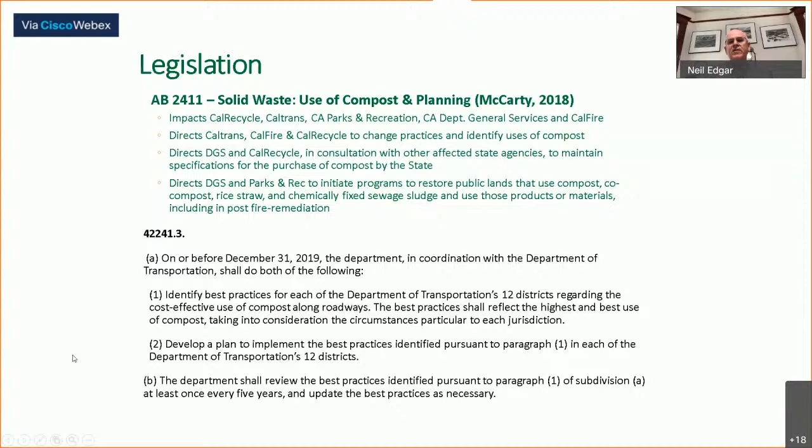AB 2411 passed 2 years ago and has matriculated this workshop effort and a renewed effort between Caltrans, CalRecycle, adding in the Department of Parks and Recreation, Department of General Services, and CAL FIRE, directing CalRecycle, CAL FIRE, and Caltrans to change practices and identify the use of compost. It directs DGS and CalRecycle to maintain specifications for the purchase of compost in the state, which Caltrans has had in place for several years, but this will extend out to other state agencies. And it directs the Parks and Rec Department to initiate programs to restore public lands that use compost, co-compost, rice straw, etc.

My one takeaway is that we need to help build markets for the additional compost and mulch products that are going to be recovered under SB 1383 programs. And we're going to need everybody's help in developing those markets, including Caltrans, Department of General Services, Parks and Rec, and every agency in the state to help move materials to sustainable uses. I am happy to answer any questions.

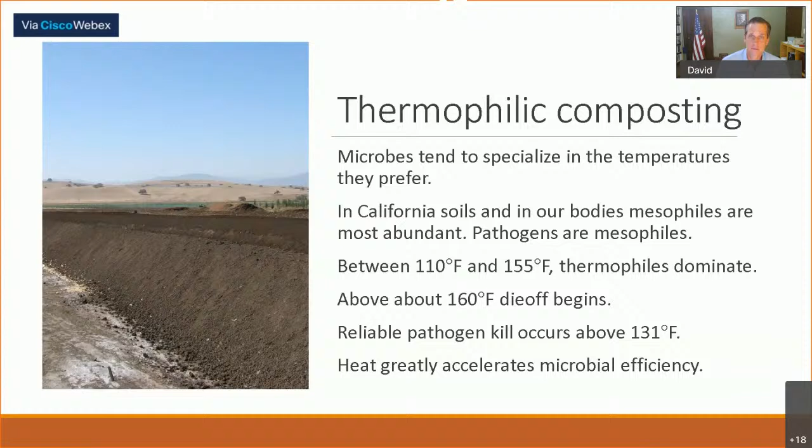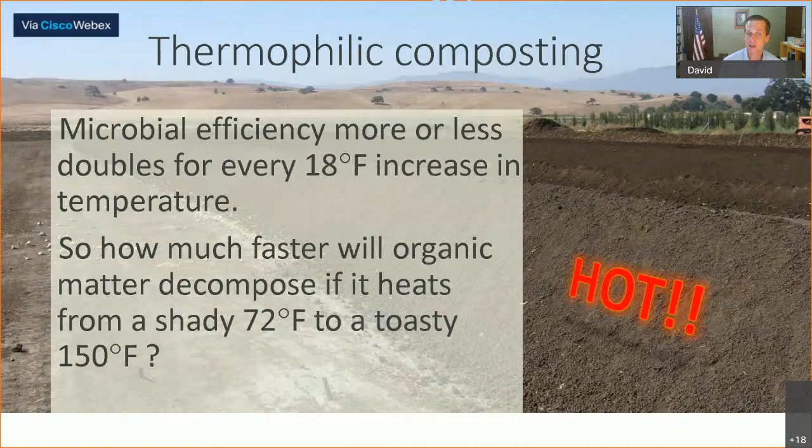If you're a composter in the compost business, you don't make money by having a bunch of material on your site. You make money by bringing in feedstock and moving it off as cured compost. Heat accelerates how fast microbes work. For every 18-degree increase in temperature, microbial efficiency approximately doubles. So how much faster will organic matter decompose if it heats from a shady 72 degrees Fahrenheit to 150 degrees Fahrenheit, as you'd find in a compost pile? The answer is 25 times faster. That's a big deal.

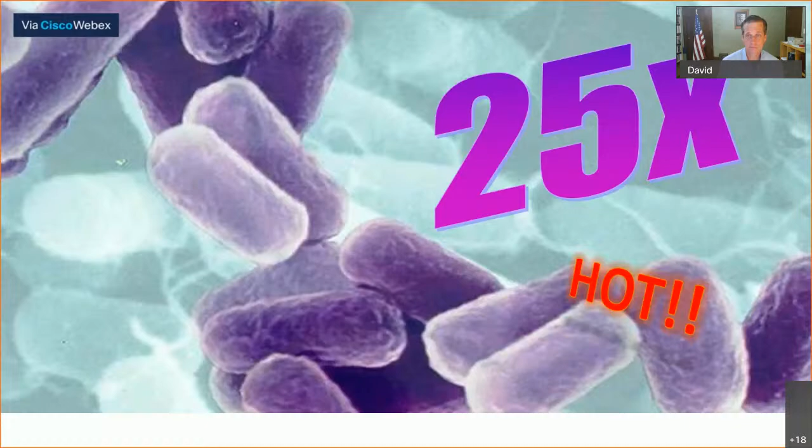So why compost? We compost for a variety of reasons. We want to eliminate disease organisms. Sanitation is important - we can eliminate animal diseases, human diseases, but also plant diseases. We're taking these materials and applying them to plants, so we don't want to be transmitting diseases. We also produce a nice, stable, and safe soil amendment, one that releases nutrients rather than tying them up, and one that's free of objectionable odors and phytotoxins. During the compost process, as materials break down, they can go through forms that are actually toxic to plants - phytotoxins. So you want to make sure it's stable and those phytotoxins have been thoroughly decomposed before you apply it. Composting takes care of all these issues.

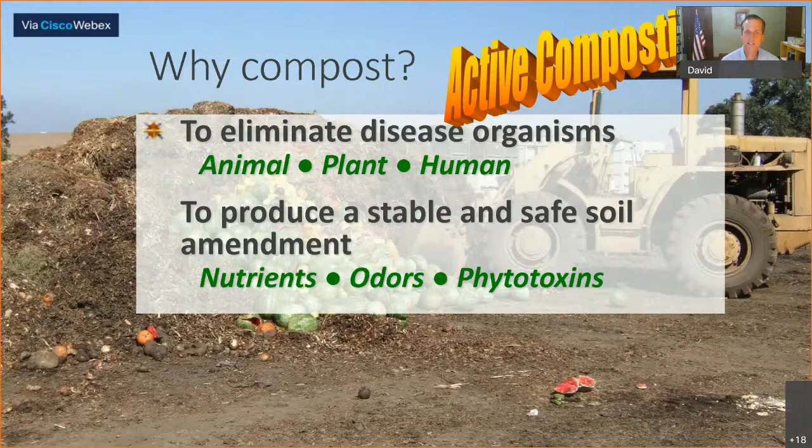It takes care of it in two phases. In the active phase, the pile is crazy hot and the microbes are getting everything they need to thrive and reproduce. It's an enormous party in the pile, where they're grabbing a bit of food, partially decomposing it, throwing it over their shoulders, and grabbing another one. Those nibbled materials can be toxic to plants and can contain odors. So during the party, it's a big mess - chaos. Eventually the food gets eaten up to a point where it's less interesting. What happens at a party when you start to run out of food? The party dies down, people leave, there's less activity. What's left over is a mess, and you have to clean it up. You clean it up through curing.

A composter manages the material very carefully. During the active phase, it's hot with a lot of action and activity. During the curing phase, the pile is just left to sit, and microbes clean up partially decomposed materials that may have odors or be phytotoxic, until the material is nice and stable and ready for use. That's called curing. You want a well-cured material, free of objectionable odors, before you use it.

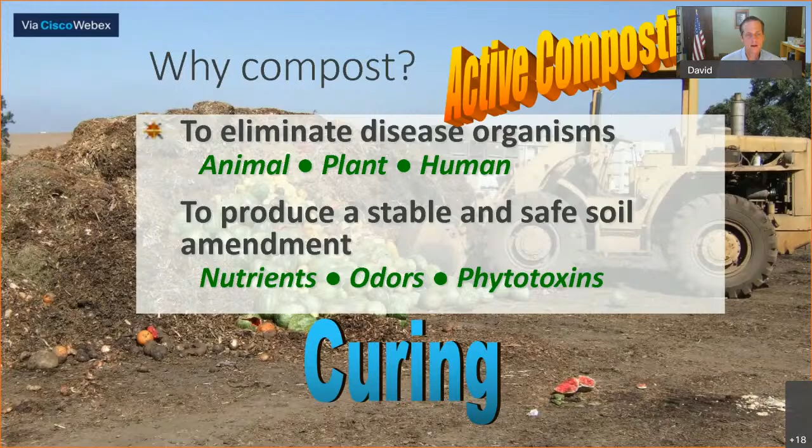Compost, of course, has some odors - we call those odors good and appealing when it's a good material. So composting is a biosecurity measure for plants, for animals, and for humans.

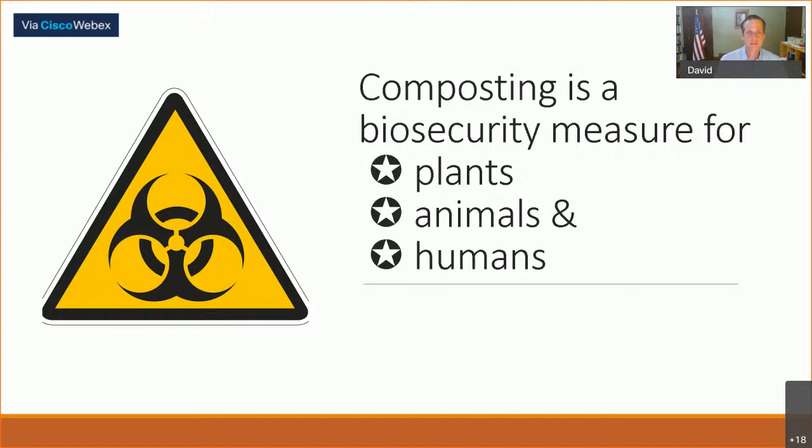All right, so we're going to circle back through what we just talked about and go into more detail now. A composter is manipulating a variety of components in order to achieve optimal results, optimal conditions for the microbes.

Carbon is the source of energy for the microbes, just as it's our source of energy. The composter will deliberately provide that to the microbes through the feedstock. But not all forms are equally available. You know your sugars are more available than anything else in your diet. You've got fats and proteins and maybe waxes too, and you can break those down.

Microbes can also break down cellulose, which is the stuff you find in wood chips, and lignin, which is an even more recalcitrant or difficult to decompose material that you also find in wood. So if a material has a lot of cellulose and lignin, it's going to break down more slowly out in the environment.

Sugars, fats, waxes, and proteins are going to break down mostly in the composting process itself. But you have to have the carbon there to provide the microbes food.

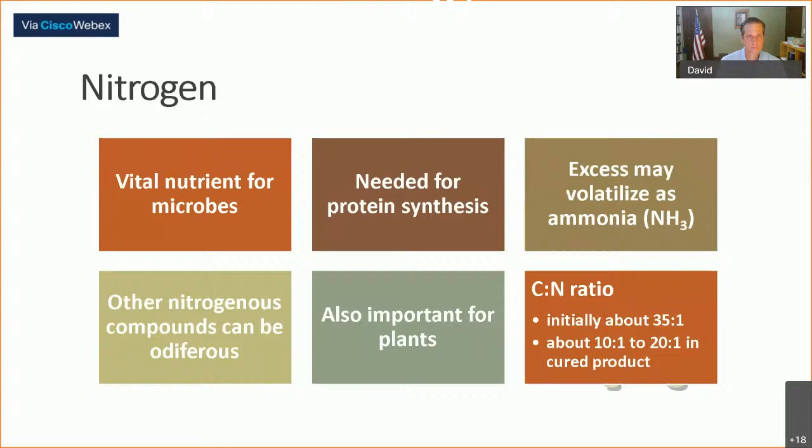Oxygen. Why do you breathe? You all know that you need to breathe—you're breathing all of the time. If you don't breathe, you feel really uncomfortable pretty quickly. But why do we do it? We do it because oxygen acts as an electron acceptor.

As we break down our food, a chemical reaction occurs and we release energy. But the amount of energy is determined quite significantly by where we put electrons that are being transferred within the reaction. If we transfer those electrons to oxygen, we can release a lot of energy—it's really, really efficient.

Okay, same in a compost pile. You can have a compost pile without any oxygen, and it will break down, but really slowly. You won't get the heat you need to inactivate pathogens, and you'll have odor problems. So the most important thing in managing a pile to avoid odor problems and achieve rapid processing is to make sure oxygen is available to those microbes.

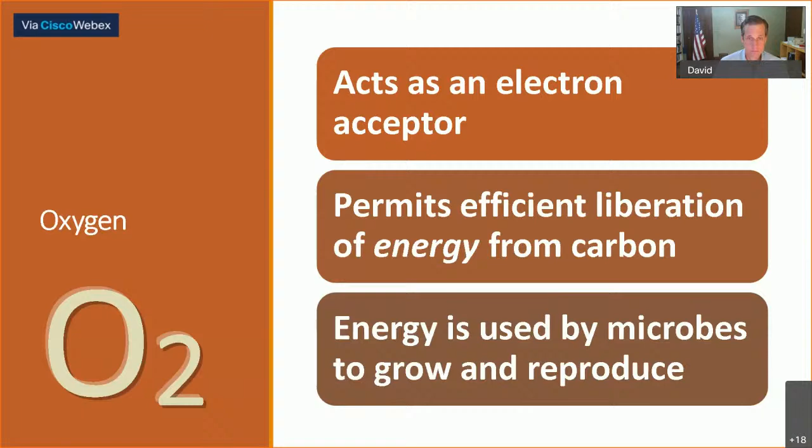So you saw this slide earlier. This is called a turned windrow.

Why do you turn a pile? Now, most people think you turn a pile because you're stirring in oxygen somehow, mixing oxygen in. But there's a huge amount of activity in these piles, so the oxygen you get into the pile when you turn it is probably gone within just a few minutes. It gets depleted because there's so much activity, consumed right away.

But a turned windrow is a really beautifully designed heat engine for restoring oxygen into a pile. What happens is, in the middle of a pile, you have heat, because compost, it turns out, is a great insulator. If you ever put your hand into a large pile, you can feel it gets hot right away, and it holds that heat. So the gases given off by the microbes, that carbon dioxide, expand and rise out of the pile like a hot air balloon.

But nature abhors a vacuum, right? You've heard that. So what happens is that creates a draft, and as the used air leaves through the surface of the pile, it creates a draft that brings in fresh air from the sides. And so you get this cycle of restoration of oxygen.

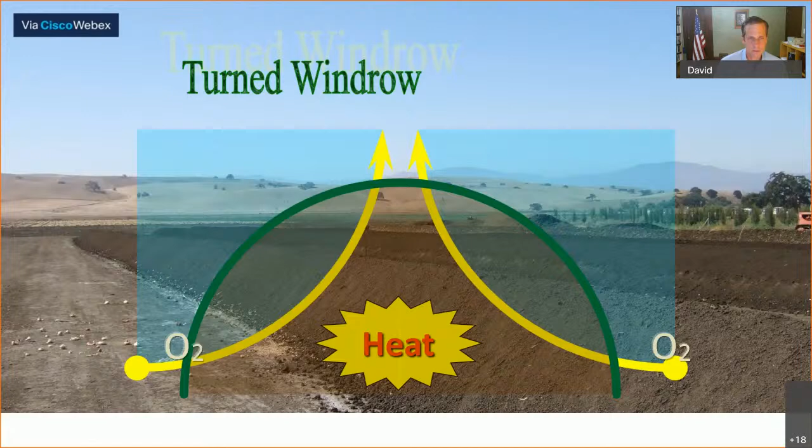Water. Okay, water is critical too. Water is where the microbes live. They live in a bath on the surface of particles. The water clings to the compost particles really well. Microbes live in that bath, and they can't live without it, really. They can't reproduce without that water bath. They live in the water.

But if there's too much water, it fills up the pores in the pile, and then oxygen can't get in. So composters need to make sure there's enough water for microbes to have a place to live and grow, but not too much so that they don't fill up the pores, so that it goes what's called anaerobic, or without oxygen.

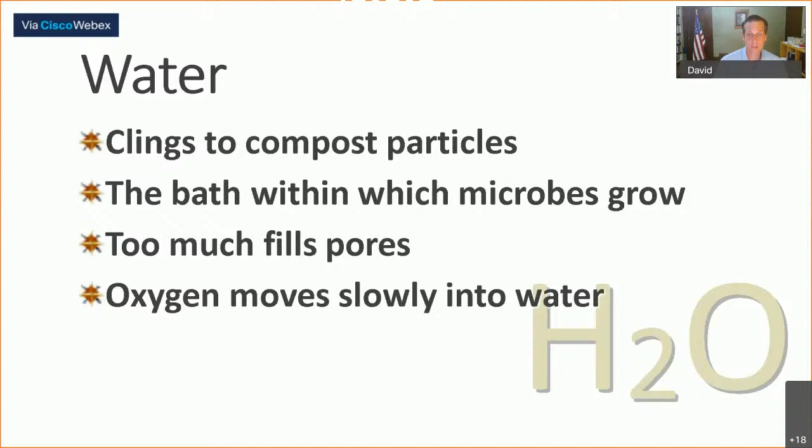So here's a picture of compost particles, and there are passages between the particles through which air moves. Inside the particles, there's not a lot of air, but that's where the food is. Outside the particles, that's where the air is. So the microbes are living on these thin films of water surrounding the particles. They get their oxygen from outside the particle and their food from inside the particle.

And you can see if there's too much water, those pores that the air is moving through are going to get filled up, and the microbes won't have the oxygen that they need. It goes anaerobic, and that's when you get the odor issues.

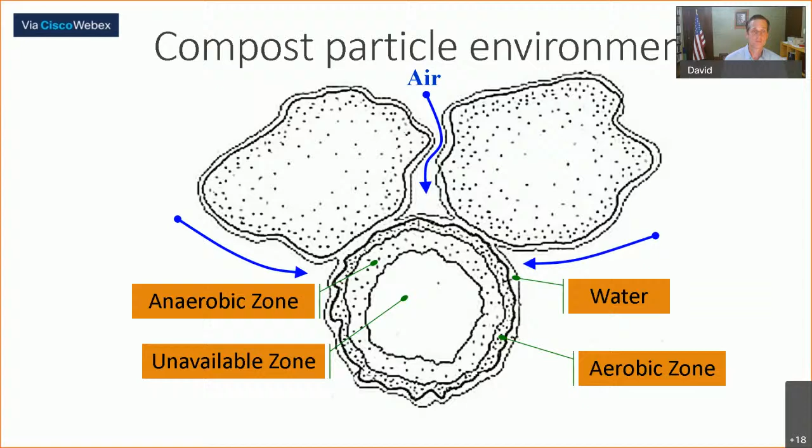Next slide. We have three broad categories of compost technologies. We just talked about turned windrow. That's the majority of our systems.

Turned windrow systems are very efficient, but they do require a certain amount of land. And so we're seeing an increase in static piles, because those can be built a little bit closer to residential areas, for example, or places where people are around. In a static pile system, you're actually forcing air through the system mechanically, rather than just turning it and allowing that passive heat engine to take place. Those are becoming increasingly popular.

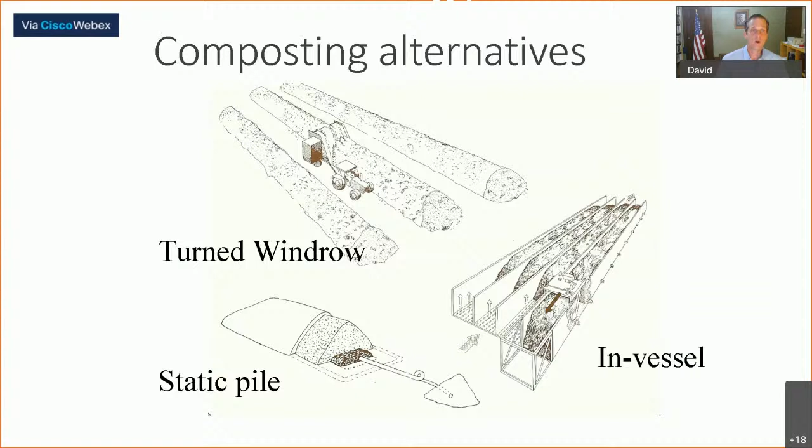In-vessel systems, you can do composting indoors. And if you do it indoors, it's an in-vessel system. Those are nice for engineers because you can capture the gases coming out of the pile and treat them, but they are much more expensive than the other alternatives.

Next slide. All right, so you're a composter, you've got your technology. What are you managing? Particle size. You want a size that's big enough to create those pores, but not so big that the microbes can't eat it in time for market. If the particles are too big, it's really hard to consume the inside. If they're too small, the air can't get through as well. Particle size is directly related to porosity.

Turning also contributes to porosity, increasing those pores so that air can move through. The carbon to nitrogen ratio is the balance of nutrients to the food source, food supply. Water is where the microbes live, they need that home. If there isn't enough, they won't have it. If there's too much water, it fills up the pores and they don't get enough oxygen. And then oxygen is that electron acceptor that they need, basically, to breathe.

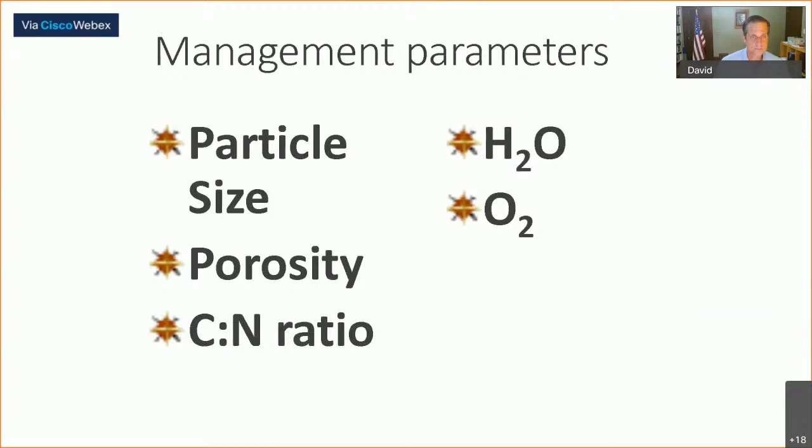Next slide. All right. Soil improvement using compost. So let's talk about how you use compost to benefit soils. Next slide.

Okay, so here's a picture of a food web in a soil. We have microbes in the soil. What are they eating? They're eating plant parts that are decomposing. They're decomposing those plant parts, and they're relying on the plants above them for their food supply. So it's in the interest of a microbe to develop a soil that promotes plant production, because that's what they're depending on for their food.

So it's not a coincidence that microbes actively improve soils so that plants do better. And then all the other animals in the soils and on the soils then eat both the plants, and they actually eat the microbes that are decomposing the plants in the soil in this trophic network through bacteria, fungi, nematodes, all the way up insects to animals. So this is the foundation of our ecology.

So how do they transform the soils? What gives them their superpowers? Well, if you have a soil that's sandy and doesn't hold water, compost will help it to stick together so it can hold water. If you have a clay soil that's really heavy and you can't get air or water through it, compost will stick those clay particles together so that they will aggregate. And those aggregates behave very differently. We'll talk about that in a second.

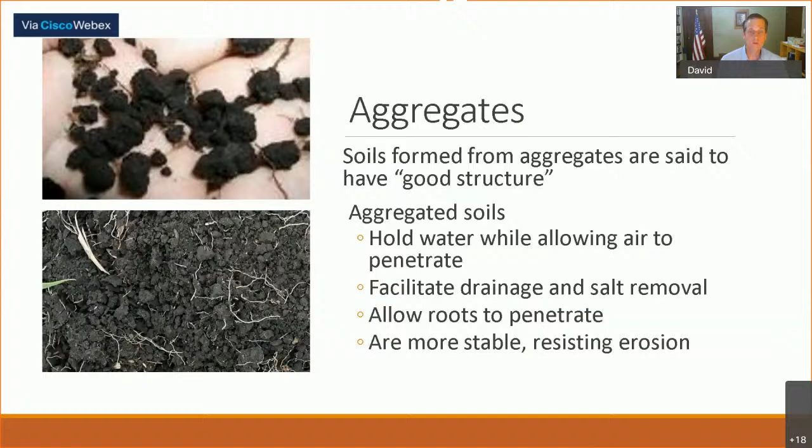An aggregated soil holds water, but it also allows air to penetrate because roots need air. It facilitates drainage, so water doesn't just pond on an aggregated soil, it moves through. And if you have salts that you need to remove, that facilitates salt removal. It allows roots to penetrate. And aggregated soils are also more stable, so they don't erode as quickly.

So we apply soil amendments. What's a soil amendment? A soil amendment is a material you're mixing into the soil, not on the soil, into the soil. And it aggregates the soil when it's compost, and that improves tilth. It improves water holding capacity - you can hold more water now. It improves aeration, since roots need oxygen. It improves infiltration capacity.

If you have a soil that's acid or alkaline, using compost doesn't move it a lot, but it will tend to move it toward neutral. And most plants like a neutral pH. You can buy specialty compost if you're growing acid-loving plants, or alkaline if you want an alkaline environment. It also promotes microbial activity and diversity, and that robust microbial environment can help to suppress certain diseases.

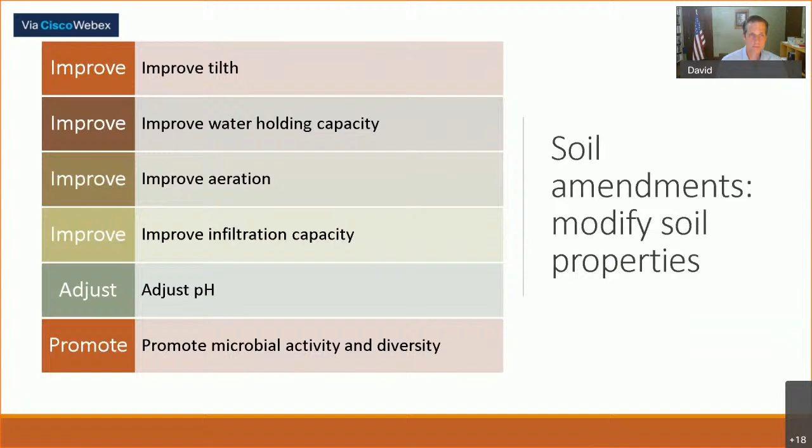So you're mixing in the compost, you want to aggregate it. Keep in mind that these changes take time. You're applying, typically in an agricultural environment, not nearly enough to see an immediate change in the soil structure after you put in the compost, because it's not the compost particles being introduced to the soil that's changing it. Remember, it's the microbes breaking down the compost, the fungi sending out their hyphae, the bacteria gluing the soil particles together that's forming these aggregates that's enriching the soil.

So it takes a bit of time - it can take a few years, and it takes repeated dedication, but you do see improvements. In the laboratory, interestingly, it takes us longer than in the field. If you ask farmers how long it takes, typically they'll say like 3 or 4 years. In the laboratory, it can take longer when we're applying at the agronomic rates typical of agriculture. If you're in a horticultural operation where you can apply a lot more compost affordably, you can create changes much more rapidly.

But when you're picking a soil amendment that you're mixing into the soil, you want it to be mature. You don't want it to have an off odor. If it has an off odor, that's an indication that it's not fully mature, and it may have phytotoxic compounds still present - and those are poisonous to plants.

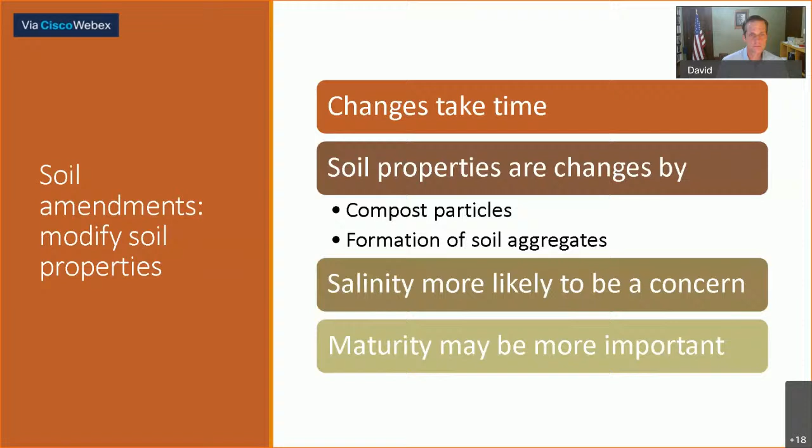Mulches. A mulch is anything covering the soil. You can use compost as mulch, and it will protect the soil against erosion. It intercepts rain particles as they fall and encourages infiltration. Mulches also conserve water because they allow water to get into the soil rather than evaporating from the surface. They control weeds by shading them, can help control certain plant diseases, and they're attractive.

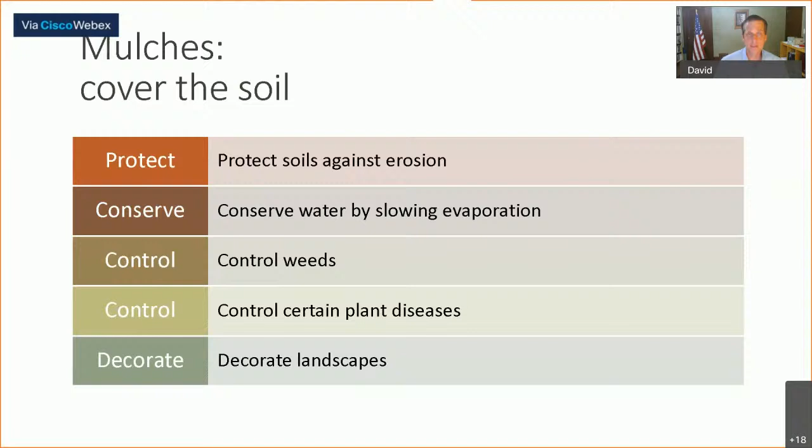So when you're choosing a mulch, what kind of compost do you want? You typically want one with a higher carbon to nitrogen ratio because you're not interested in it breaking down to encourage microbial development and transformation of the soil. The reason you're applying it is to have something that persists on the soil surface as a physical barrier against weeds and against the energy of rain falling on the soil surface. So you also want larger particle sizes.

If particles are too small, what happens? You're basically creating a bed for weeds to grow in. You're also going to hold water up above the soil, and where are the roots? They're down in the soil. So you can actually lose water if you use composts with particles that are too small. You want larger particle sizes, low trash levels because that's where you see them—on the soil surface. Maturity is less important, and phytotoxicity is probably a little less important since you're above the root zone on the soil surface.

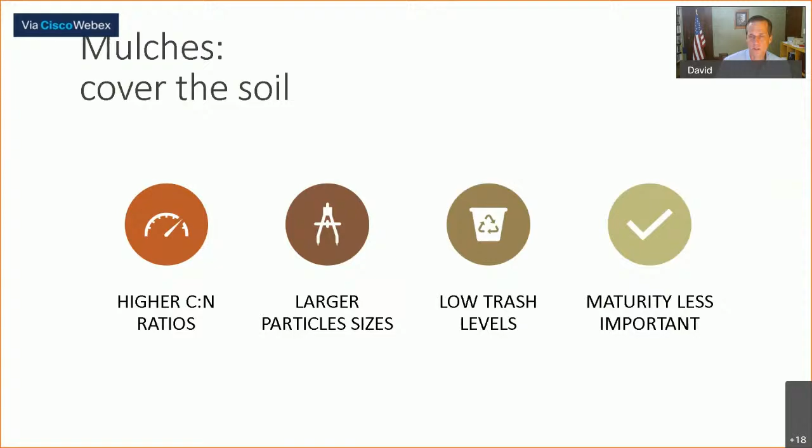Organic fertilizers. Composts contain nutrients—nitrogen, phosphorus, potassium. They're a great source of micronutrients.

But they're not typically marketed as fertilizers because the rate at which the fertilizers are released is hard to predict. It depends on the environment. It depends on the precise characteristics of the material.

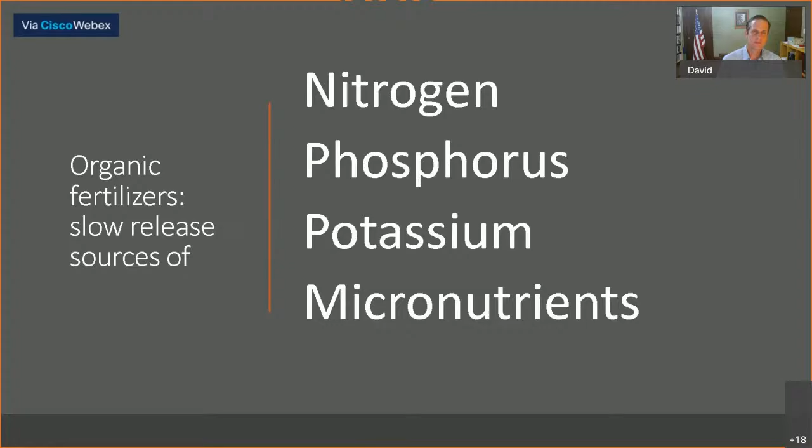So when using organic fertilizers, it's important to conceptualize them as a long-term source and account for them in long-term nutrient budgeting, but keep in mind they're not available immediately. If you're growing corn and need all that nutrient release at once, you're probably going to need to supplement.

But if you're growing plants that need nutrients gradually over time, like a lot of landscape plants, it may be all you need. It may take a few years for the compost to supply those materials continually, but they will be an important source over time, so you may need to supplement at the beginning. Low carbon to nitrogen ratios are better fertilizers because they just contain more nitrogen.

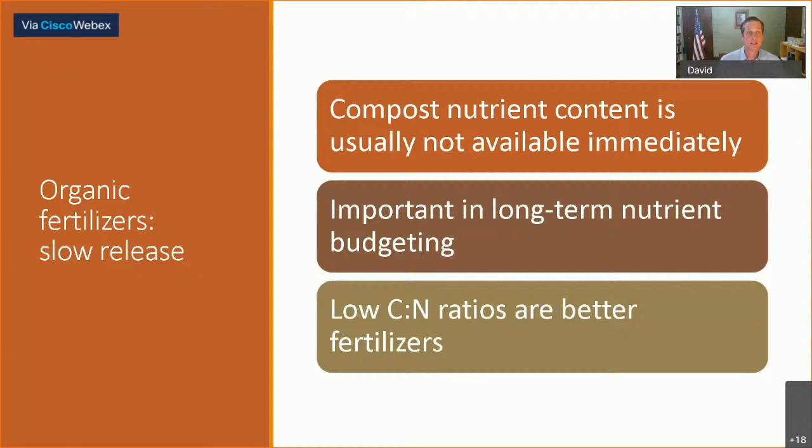Tremendous erosion control. Why? Because the water hits the compost, moves under the compost, and infiltrates rather than running along the surface and concentrating and carrying soil particles away.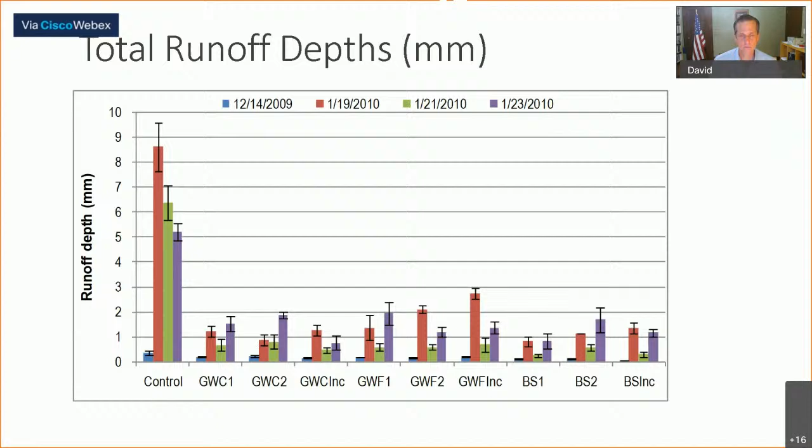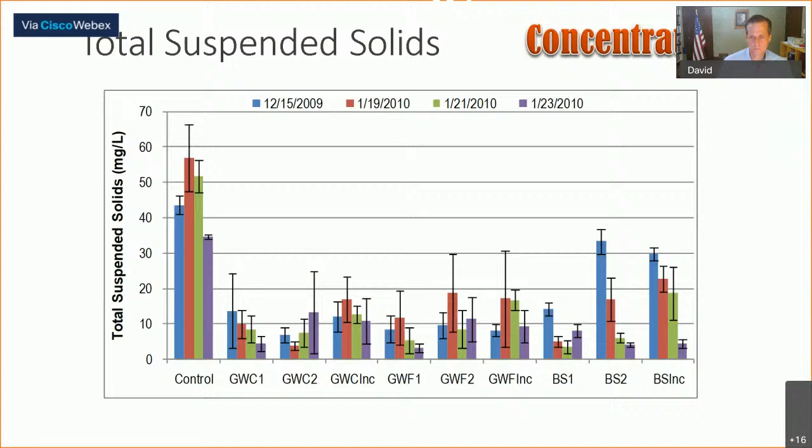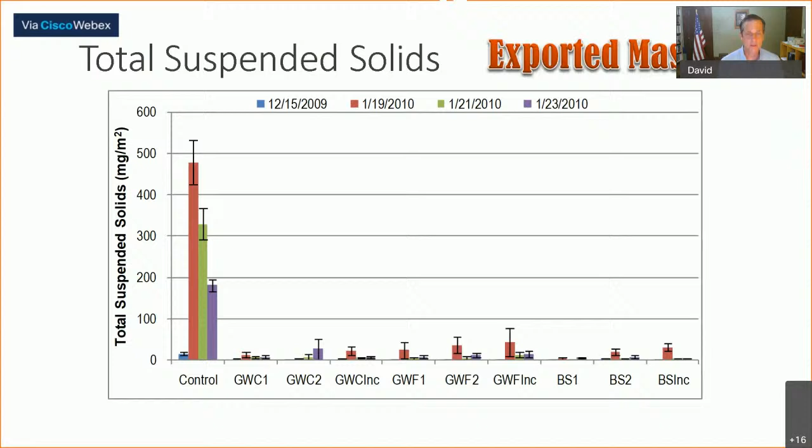Okay, so when you look at this, this is suspended solids. We looked at a bunch of constituents. Compare the suspended solids in the control versus all of the treatments exported. So we had less constituents coming off the plots as a concentration, but when you weight them by the flow rate to look at the total mass that was exported, it was a tremendous difference.

Compost blankets reduced runoff by 86%, dissolved solids by 88%, suspended solids by 96%, total solids by 97%, phosphorus by 72%, orthophosphate by 77%, suspended phosphorus by 98%, and nitrate by 73%.

We found that surface mulching and incorporation performed similarly, so we could actually incorporate it and it still worked. We also found that less was a little bit better, because with some of the things like biosolids we were actually introducing things like phosphorus, but we weren't getting additional benefits. So it was better to go with less rather than more. And we didn't really see much difference between overs and fines as far as pollutant export, which was interesting.

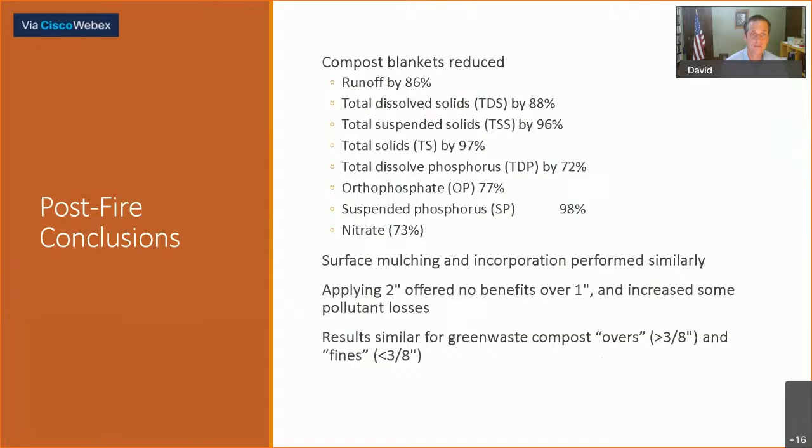So in summary, composting stabilizes organics so that plant and human diseases are eliminated and weeds are reduced. It's a biosecurity measure. Composts inspire microbes to improve soil structure so that they hold and transmit water better, that they retain nutrients, and plants thrive. Compost mulches can control erosion that follows fires. And I am ready for questions.

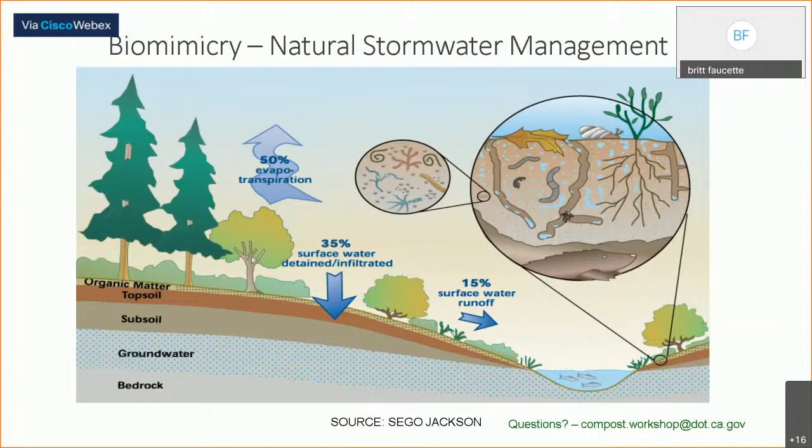If you're relatively new to these applications, you might be surprised that every national or federal agency or organization with the ability to specify or create a guidance document for these BMPs has done so: the US EPA's National Menu of BMPs, the USDA NRCS, the Army Corps of Engineers. The first and original one was through the American Association of State Highway Transportation Officials. Most recently, the US Composting Council. And there's at least one jurisdictional agency, whether the Transportation Department or the State Environmental Protection Agency, in each state that has created a spec or guidance document for these BMPs. In many states, both of them have.

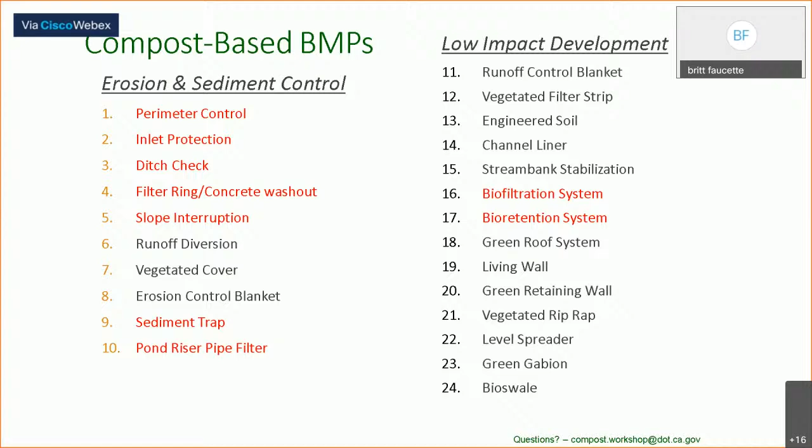After that, towards the end, I'm going to transition to that erosion control blanket compost media. The applications you see in black font here are going to be more related to those applications. Next slide.

So I wanted to give you a visual representation of what these look like in the field, and I think you're going to see a lot more examples of these over the next 2 days in different applications. What you see here is using it for perimeter control along a roadside, slope interruption applications, check dams, inlet protection, and stacking them to make a larger sediment trap. You also see it being used in bioretention and bioswale applications as well. Next slide.

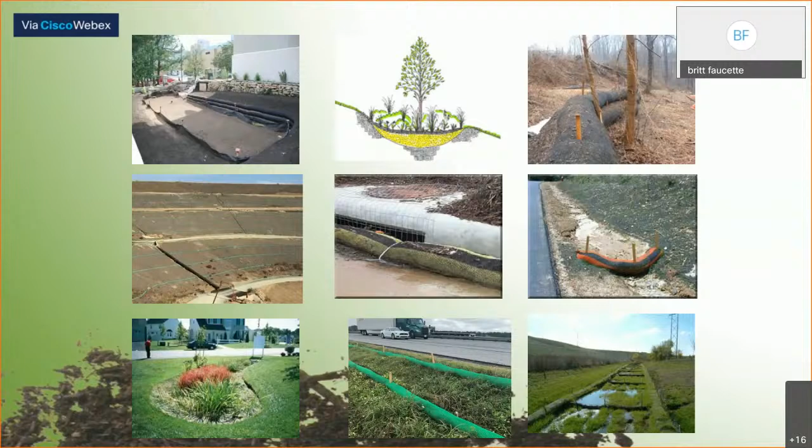This is really no different from what happens when we increase the pore spaces in the material or media. In filtration parlance, we'd call that apertures. It's really no different than how a water filter is designed for your refrigerator or a pool or a sink, or your air filter in your HVAC system or automobile. You increase the pore spaces or apertures, you get a higher flow rate, but you trap less stuff. You cinch down on those pore spaces or apertures, you restrict flow to a greater degree, and you begin to trap more things.

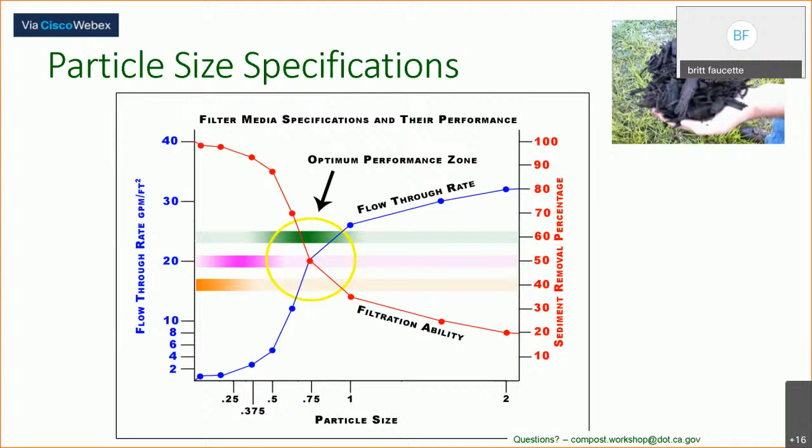One of the things that's really unique about compost filter socks and compost biofilters is there's really a 3-way filtration or biofiltration process. The first one isn't incredibly unique, and I've already talked about and described it. We're manipulating particle sizes, creating pore spaces that allow the passive flow of water, and trapping particulates and sediments.

What is unique are really the next two. There's a chemical component - I don't mean we're adding chemicals - but a high quality mature compost, per particle, has a very high surface area and the ability to adsorb or sorb soluble form pollutants we're trying to trap in stormwater, like ammonium, nitrogen, and a variety of metals. In fact, the US EPA has advocated for many years, and has a guidance manual, for using compost in polluted soil applications to target these same pollutants. Now we're using it in a water context as well.

There's a biological component too. If the material hasn't gone through this composting process, like just a wood chip or mulch material, it doesn't have the high surface area per particle that allows for trapping these pollutants, and it doesn't have that sorption capacity either. Some folks may be familiar with activated carbon or charcoal used to filter water - it's the exact same concept, except compost doesn't have the degree of surface area that activated carbon does.

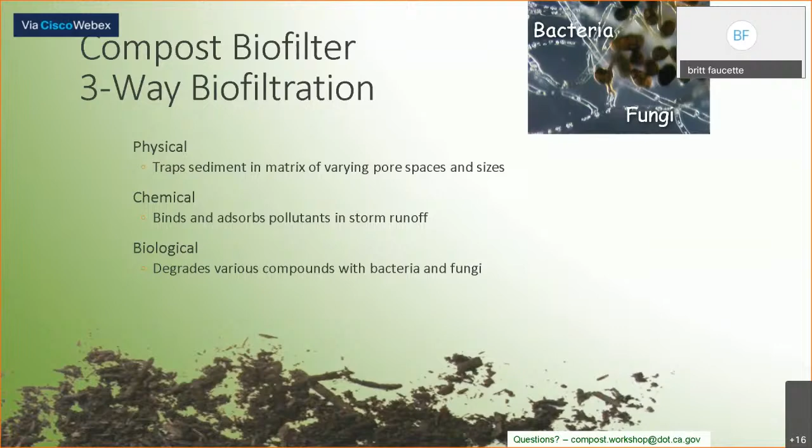So I want to share some of the key research behind compost filter socks and biofilters. This is a study done at the USDA Ag Research Service, published in the Journal of Soil and Water Conservation, looking at the percent reduction in suspended solids as well as turbidity with a compost filter sock compared to a silt fence. You can see the values there.

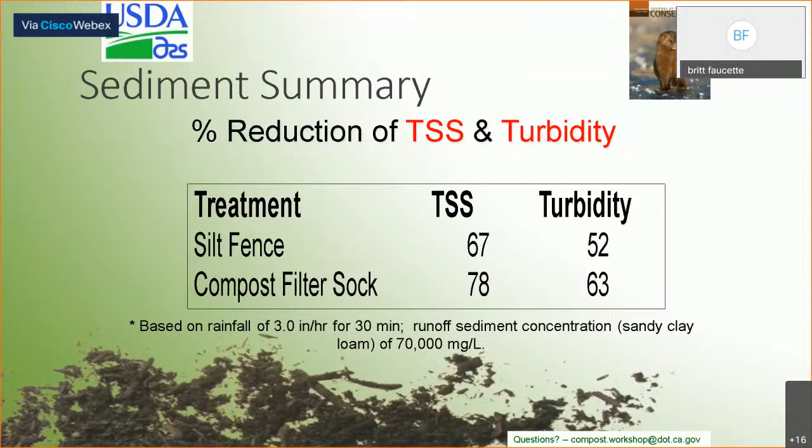A similar study done at the University of Georgia, published in the same journal, different issue, looked at suspended solids reduction on large-scale field test plots. Two key things came out of this study: compost filter socks perform significantly better than other natural materials used for sediment control, like wood chip berms and straw bales. But they also found that a larger diameter compost filter sock didn't improve removal efficiency of sediment - the main reason to go larger is to handle greater drainage area or longer slope lengths, meaning more storage capacity within the system.

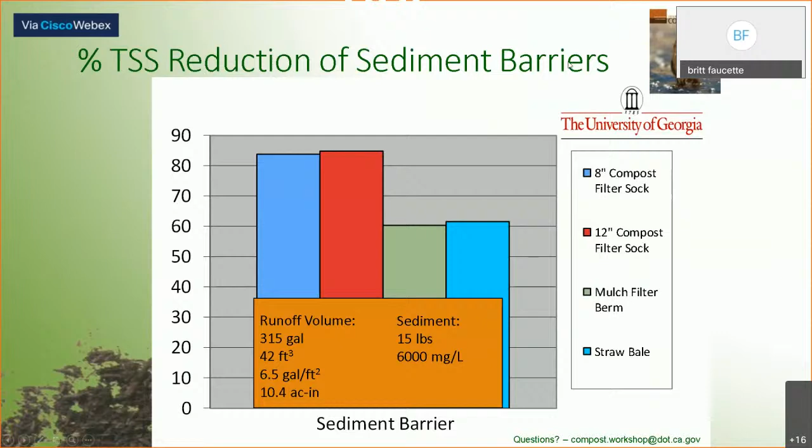Finally, the USDA Ag Research Service wanted to take a look at how these compost sock biofilters could target pollutants beyond just sediment, using them in more of a post-construction stormwater treatment context. We know there are quite a few studies now showing that the total pollutant load in post-construction stormwater can be, on average, about 80% soluble. So you need treatment systems that can target these soluble form pollutants - pollutants not attached to particulates or sediments - whereas wattles and silt fences are not going to work in these types of applications.

That's really what the premise behind this study was, moving past the TSS and turbidity removal efficiency. All of these are in the soluble form of stormwater pollutants in these studies.

Nitrogen species, phosphorus, total coliform and E. coli bacteria removal. They looked at a variety of metals: copper, cadmium, chromium, nickel, lead, and zinc. They also looked at hydrocarbons, motor oil, and diesel fuel. The results from this study have been published jointly in the Journal of Environmental Quality and the Journal of Soil and Water Conservation.

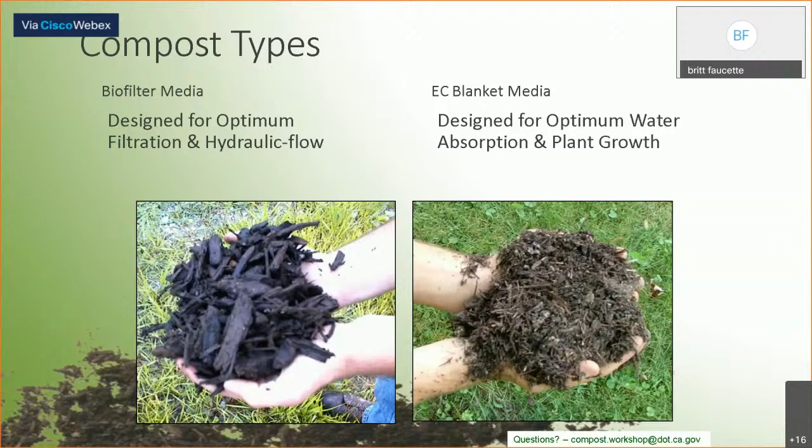There are 4 key reasons why a compost blanket works and performs the way that it does, and David talked about these in his presentation as well. Number 1, whenever you cover bare soil, you're preventing that first stage of erosion, which is splash erosion or soil particle dislodgement. Picture when raindrops come down, they actually almost till up the soil. They loosen up soil particles, they break up soil aggregates, and they loosen it up.

Now we call it sediment. We prevent that from occurring when you cover it with a compost blanket.

Number 2, these things are actually natural megasponges. Because of the porosity, the surface area, and the high organic matter content, they actually hold an immense amount of rainfall right there at the soil surface. If you're holding that moisture there, you allow for natural rates of infiltration to go into the soil below, and you're beginning to restore those natural evaporation rates going back up into the atmosphere. You're beginning to restore that natural water cycle, or hydrologic cycle.

It's the smaller particles that really help to do that. It's the larger particles that do the third one: once it does reach its water holding capacity or field capacity and can no longer absorb any more and you do get runoff, you want to keep it as slow as possible. By keeping it slow, it's less destructive, less erosive in nature, and it actually transports less pollution in the process. And if it's slow, it will find pockets of infiltration as it moves across the landscape as well.

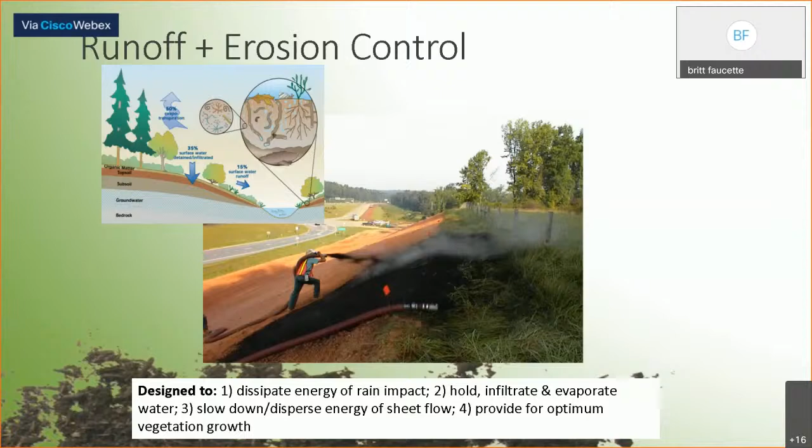So it's the larger particles that do this, it's the surface roughness that has been designed right into the material. And then, of course, the last one: compost is pretty darn good for establishing and sustaining vegetation as well.

This is a study at the University of Georgia, published in the Journal of Soil and Water Conservation, that showed a compost blanket on average could absorb 84% of a 4-inch rainfall event. Think about that for a moment. If you're absorbing that much rainfall, 95% of the events we're going to see, which are quarter inch, half inch, three-quarter inch, one inch, you're absorbing all or nearly all of that rainfall. And if that's the case, you have almost no runoff or no runoff at all. If there's no runoff, there's no erosion. If there's no runoff, there's no transport of pollutants.

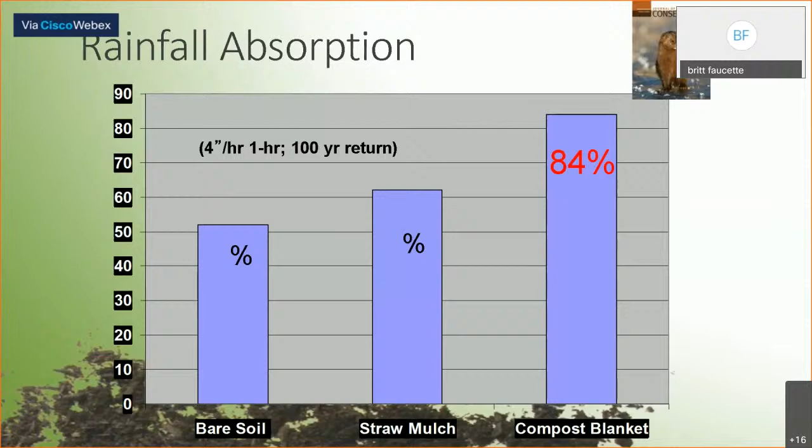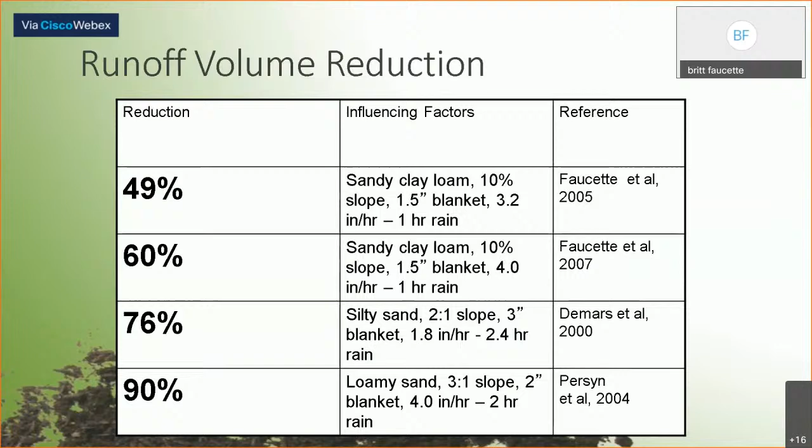Similar for reducing that peak flow rate, same studies between 36% and nearly 80% reduction. Next slide.

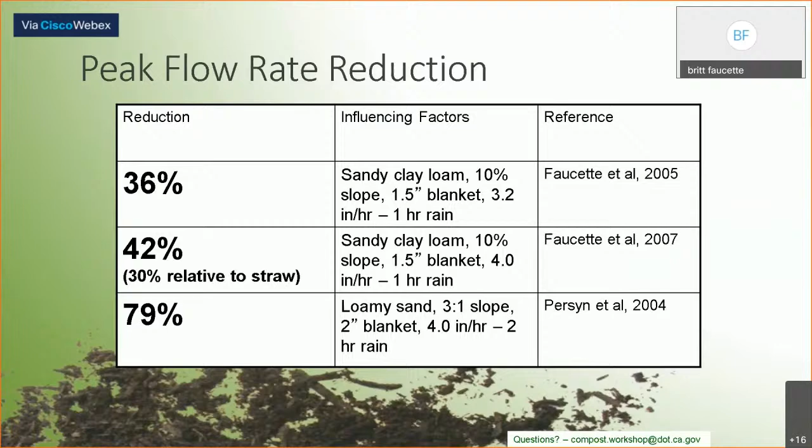These are 4 university studies that compared a compost blanket, a seeded compost blanket, to the way that we conventionally establish vegetation on disturbed soils or construction site soils. I've put that in parentheses in each one of the studies. So what you're looking at here are percentages of the percent reduction in pollutant loads associated with the compost blanket relative to the conventional form of vegetation establishment. You see a trend here, not only across all of these studies but across pollutant types, both for nutrients and for sediment, which is really erosion control in this case.

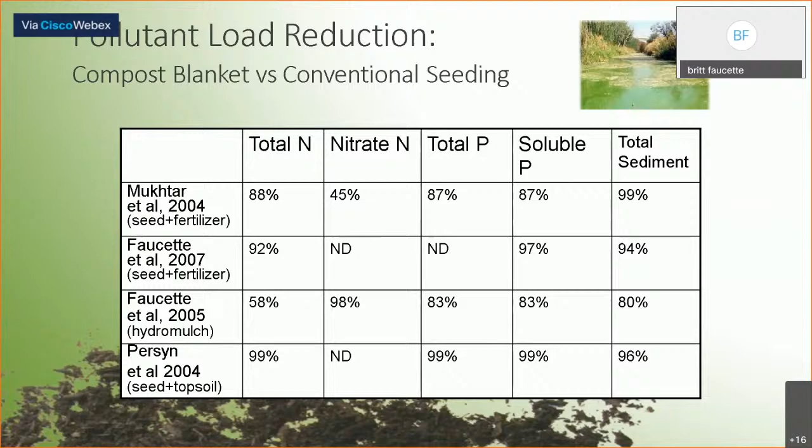There's one key reason, or one big reason why this is occurring, and that is because the compost is absorbing so much rainfall, thereby minimizing runoff. When you do that, you also concomitantly minimize pollution transport as well. We're seeing that across these studies. Next slide.

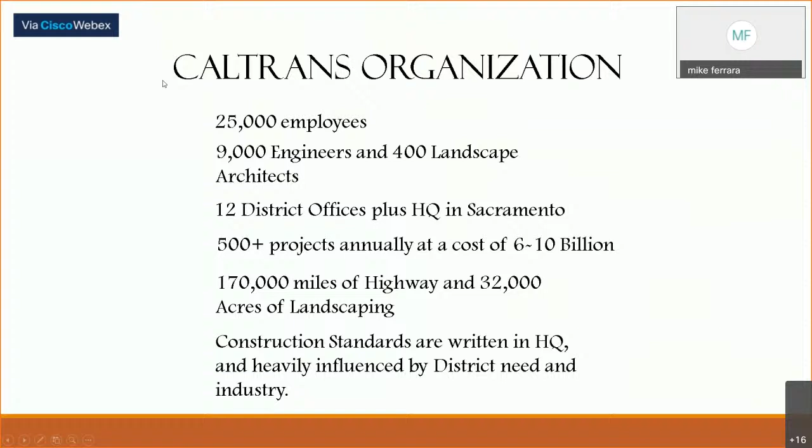The standards we're going to discuss in more detail in this presentation are developed mostly from a bottom-up process. We have a committee of mostly landscape architects, not entirely, that meet together on a regular basis, and they represent the districts, and the districts propose improvements and additions to our standards for their construction contracts.

The geography of California is, to put it in one word, absolutely amazing. As someone who spends a lot of time with outdoor hobbies, there's really nothing you can't do within the state. It's a large state, 250 miles wide and 800 miles long. It's the third largest state behind Alaska and Texas. It's number one in population—we have 40 million people living in our state now. The next closest is Texas at 30 million, but it also has a lot of rural areas.

We're the 13th state in density, so our populations tend to be more concentrated. But there is a lot of our projects that are in very, very rural and sometimes difficult places to get to.

The variety of terrain we work in is nothing short of amazing. The state has the lowest point in the United States, which everybody knows well, Death Valley. But we also have the highest point in the lower contiguous 48 states, Mount Whitney. The fact is those 2 points are within a 2 hour drive of each other, a little less than 100 miles from each other.

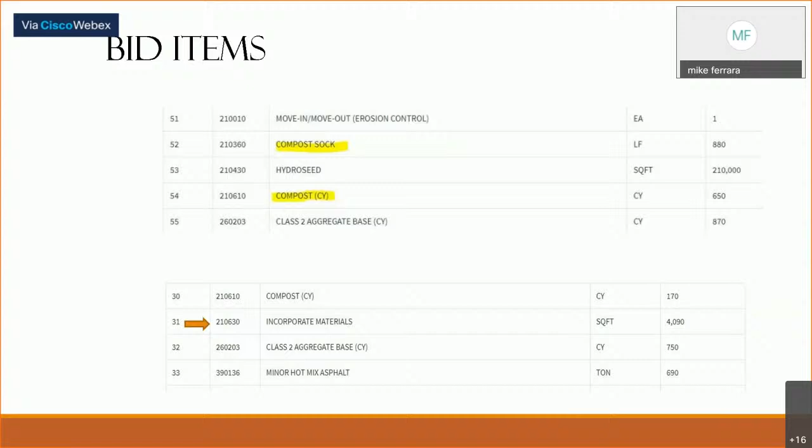This is an actual bid package, I just clipped it out of one you can pull up electronically. It's open to the public, and this is what you'll see on a Caltrans project. When you're bidding on it, you'll see an item for compost sock, typically if there's some stormwater concerns, and they'll bid on that. Then you'll have the other item of compost in cubic yards. My point with this slide is that that is the bid item for berm and for blanket—it's all purchased by the material, and we bid by the material by the cubic yard. You also see down below I clipped out the separate labor item we pay for when we incorporate the compost material into the soil. That's what that bid item would look like.

The method we use is fairly recent for erosion control. We pulled a lot of what we were doing in the specifications and now are more graphically representing what we want for erosion control on our plan sheets. We kind of call it our cake recipe, so to speak. When you look at this table, we lay out the different steps that we want. Often erosion control is a stepped process, and you can see that here, and then we show the rates over in the 5th column, what we want for each of those materials.

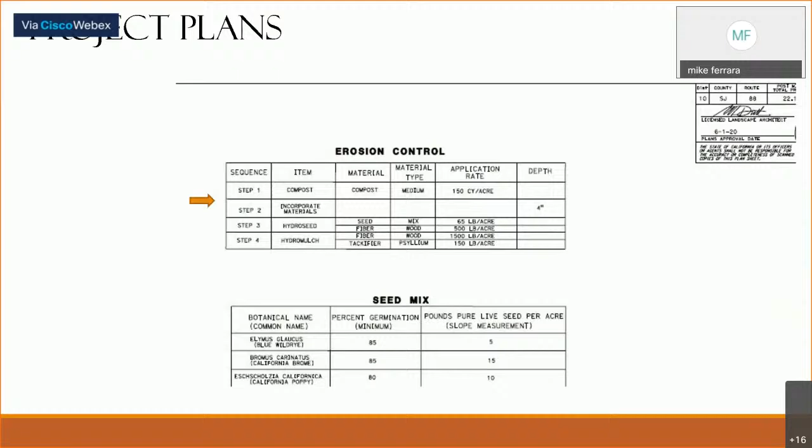We also have a standard plan, available for any contract at Caltrans. They essentially just point to it in the contract, and then it exists in a book for the contractor to look up. Here's our standard plan for our compost sock.

We used to have it available for construction with the lashing method, but we got feedback from the field and the contractors that they prefer the staking method. It seems a little easier, so we now strongly encourage that. You can see the detail with the stake through the middle of the compost sock, and a note you're not able to read says you can also place the stakes at the bottom of the sock. We also encourage overlapping when you have different lengths of sock you're trying to place on the slope.

Keep in mind, when you work at Caltrans, you become an expert at steep slopes. Even places like San Diego, which is relatively arid, some would think more desert, the slopes are commonly 2 to 1 or even steeper, and we regularly deal with slopes over 100 feet in length at those inclines. That adds additional challenges when we talk about blankets in particular, and whether or not they're going to stay on the slope. It's really project dependent. It's a very arid state, especially the southern part, and there are areas with wind we have to contend with. So you might imagine a windy place with dry compost blanket can be a challenge for us.

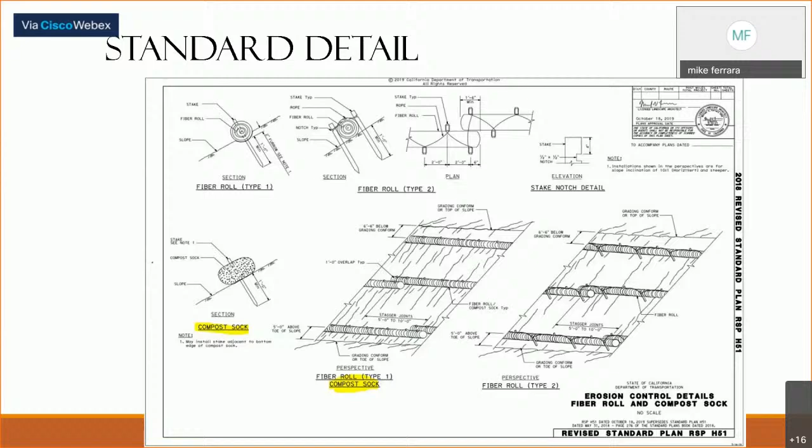We also have something called revised standard specifications, a way of making improvements without having to republish the standard specifications every time we have a change. So those are the three main written parts of the contract, along with the boilerplate in every contract, the standard plan I showed you, and the project plans and bid items. Those are the parts of the contract that anybody doing our work has to get very familiar with, and our designers are very familiar with.

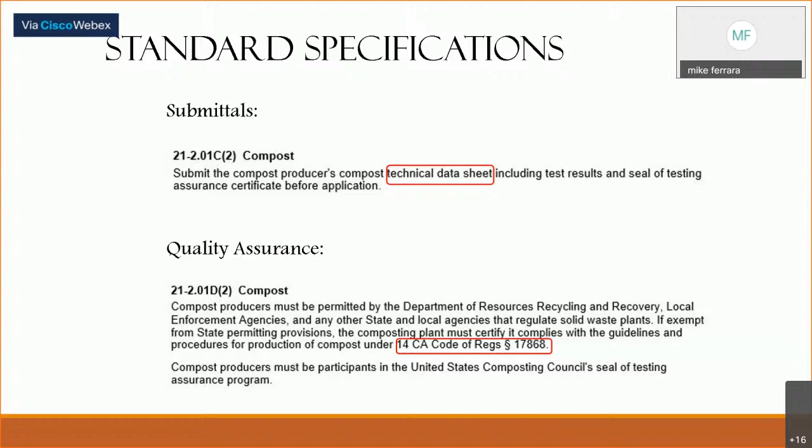I point out that there's a technical data sheet under compost. I put a little red box around it to show you that's an important part of the construction process. We also have the code of regulations, which mostly focuses on the compost producers. We're pretty highly regulated, and I'll give you more detail on that on the next slide.

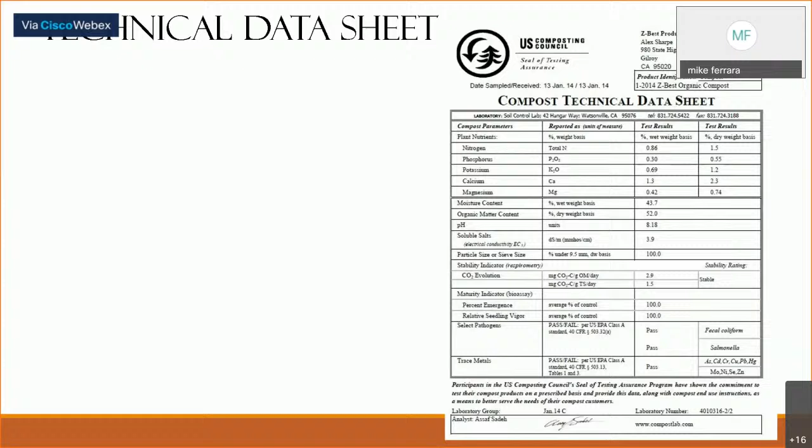That's what a technical data sheet looks like that we would get during construction. It's under the U.S. Composting Council, and shows some of the quality measurements we're looking for. It's just an example of what one would look like. That would be part of the construction process, and it has to be acceptable to somebody we call the resident engineer, who speaks on behalf of the department during construction and tells the contractor whether or not we're at an acceptable level for them to go ahead and apply the compost.

These regulations mostly focus on the compost distributors and suppliers. There's a lot there about metal concentrations and pathogens, and the levels required from them. There's also more and more focus on vegetative food material, which is becoming a greater source of material for our composting. There are a lot of grocery stores in California, and in the last few years, more and more of our compost comes from that source.

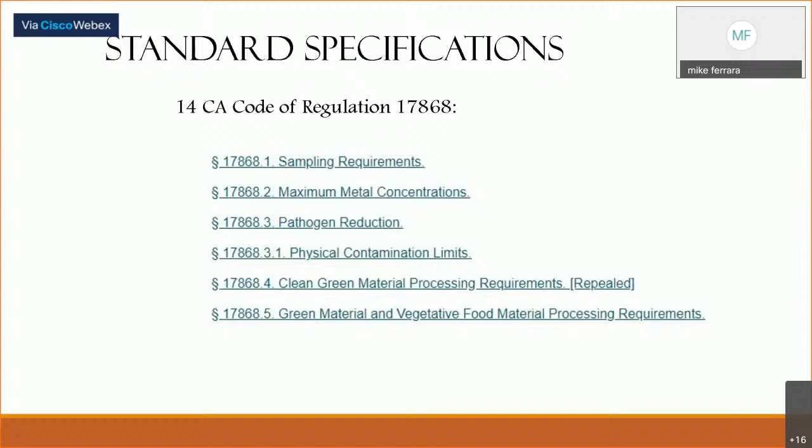There's legislation, in fact, trying to encourage more of that food waste, like Dr. Cohn showed with all those watermelons. That's a common sight here.

There's some concern from many of our engineers and managers that if we start applying compost or doing any other activities in the landscape that create very soft, uncompacted soil conditions, less than 90%, within the first few feet of the edge of pavement, that may in fact be an unsafe condition. So we have to be careful in our work, both in planting and in our stormwater and compost work, in that first few feet, 3 feet or so off the edge of the pavement.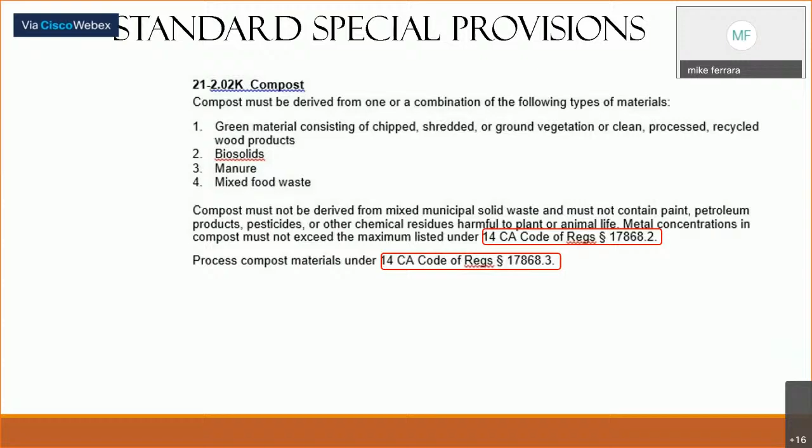This is our special provision. If you remember, that's something that goes along with the standard specification - it's more specific to the project. These are the quality measurements we insist on for our compost.

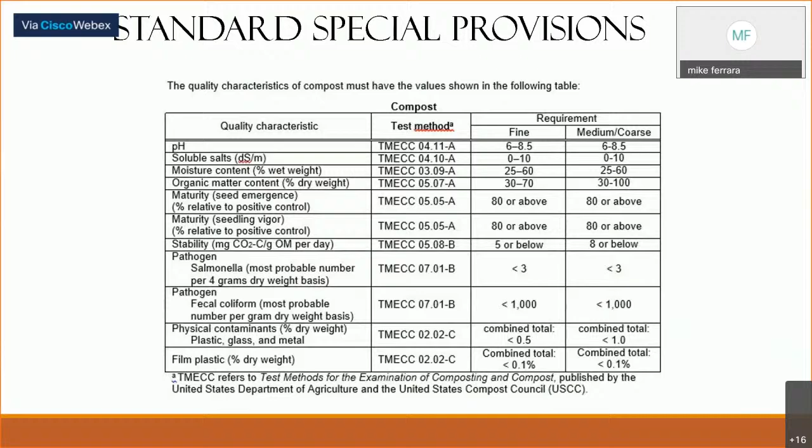We use the test methods you can see here from the U.S. Compost Council. We point to those in order to come up with these numeric evaluations of the quality of the compost. Next slide.

Probably, and this is only my opinion, we can focus a little bit more. I was really happy to see Dr. Faucette's slide on the different uses of the coarser compost. We probably can focus a little bit more on some of those uses of the coarser material that is available, and the suppliers would like us to take more of the coarse as well. So those are the ranges, and obviously there's a gradation of this in a lot of cases on many projects.

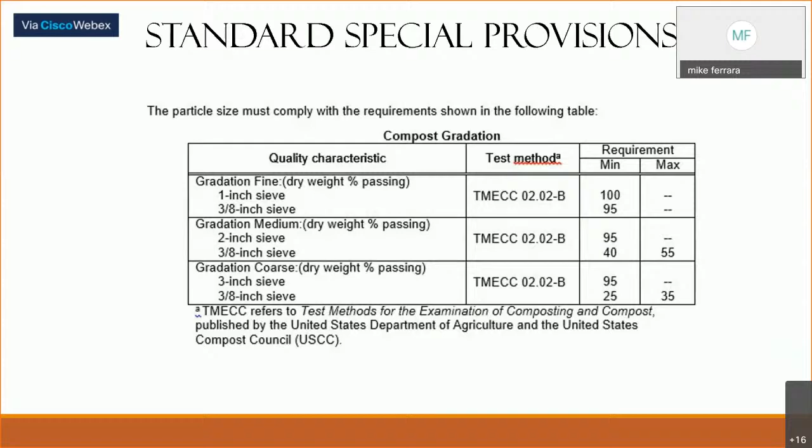Next slide. Next slide, please. I skipped one - are you able to go back? Thank you.

Compost socks have gotten very popular at Caltrans in the last 5 to 10 years, and I show in red up there, we just made that addition for the 5-inch. Dr. Faucette was talking about the smaller sizes getting more and more popular because they do the job and they're easier to construct and maybe a little less expensive. So we're just making changes now to make that size available, but there is a range for our designers to use.

Further down you can see we have some quality measurements again for what gets put into the compost sock. If you look at the last sentence of the first paragraph, you'll see it says the compost sock may be pre-filled mesh tube or filled at the job site. So we have both - we talk to the contractors.

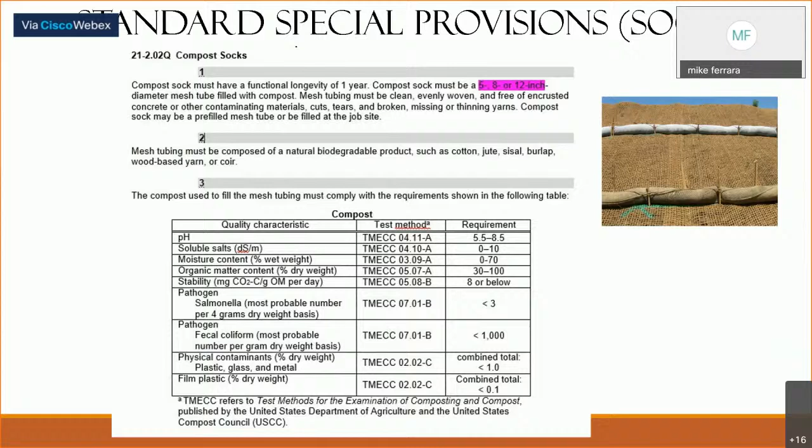Sometimes they prefer to fill their own socks, and sometimes they prefer to buy the pre-manufactured sock. So we give them maximum flexibility there. Next slide.

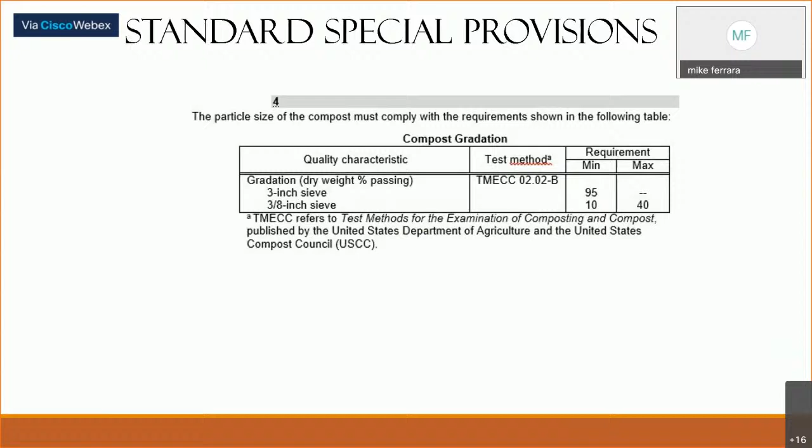Okay, thanks Mike. Thanks for running us through the process of specifying the use of compost by Caltrans. We have a few questions here.

First question: is there a best way or spot on the Caltrans website to see all of the Caltrans bidding projects that are going to be bid? Yes, there is. If they use the standard website address, dot.ca.gov, on that first page there's a click for doing business with Caltrans. From there, you can go to the place where all our contracts are shown that are currently being advertised, and you can see who some of the contractors are that are bidding our contracts. In fact, there's a place developed for subcontractors to locate general contractors and make a case to work with them. So there is a place to do that, yes.

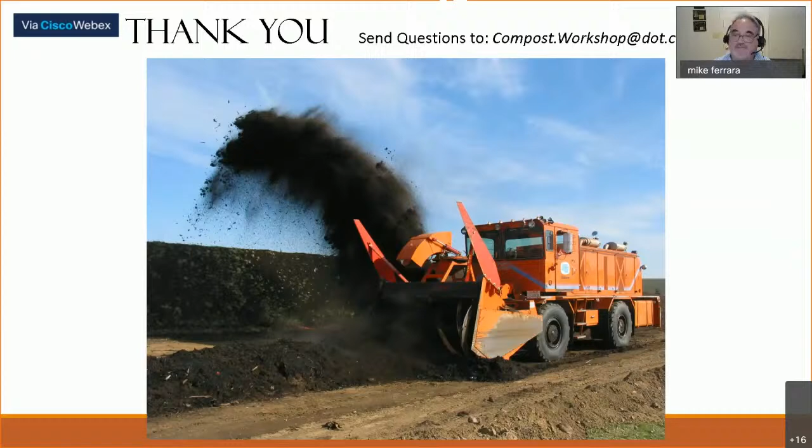Thank you, Ron. Before we get to the next speaker, I wanted to mention a couple benefits that might not be mentioned in these workshops, but are important to the overall environmental sustainability goals and mandates of California departments like the Department of Water Resources and Air Resources Board. Compost reduces greenhouse gas emissions through carbon sequestration, increases plant available water, reduces use of synthetic fertilizer, and conserves water.

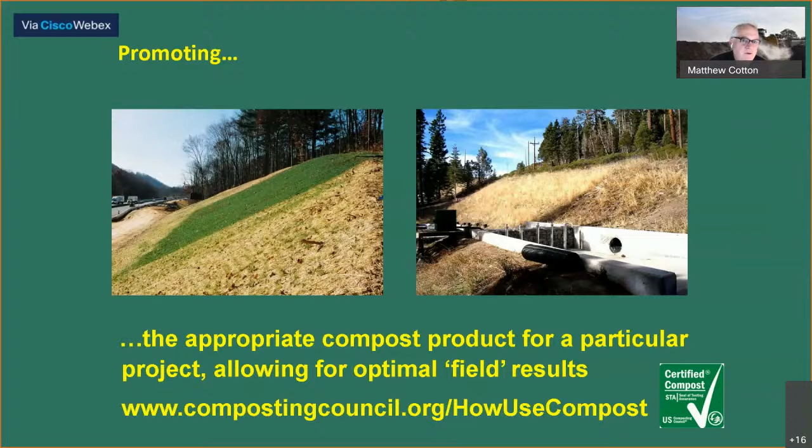They're looking at some combinations of BMPs to enhance or minimize runoff and control. So go ahead and go to the next one, Jack. Again, hoping to get folks to use the right products, all the stuff that Britt talked about, so that we get good performance, we get predictive performance, we understand what's going to happen. We don't have failures in the field. Nobody likes to see that.

So fundamentally, most of the obligations of the STA program fall on the composters. They've got to comply with local and state permits. They've got to meet the definition of a manufactured compost product. They use this document called the test methods for the examination of composting and compost, which include sampling methods, testing methods, handling methods, and there's a frequency prescribed based on the volume. Here in California, any commercial manufacturer has to test, go through this battery of tests every 5,000 cubic yards.

They're using STA labs, which are pre-certified. There's actually a lab proficiency program run out of Colorado State, which looks at the proficiency of the specific tests we're using and what the allowances are on those. You've got to pass EPA, or in our case, California pathogens, metals, and inert contaminants. That just came up in the previous conversation.

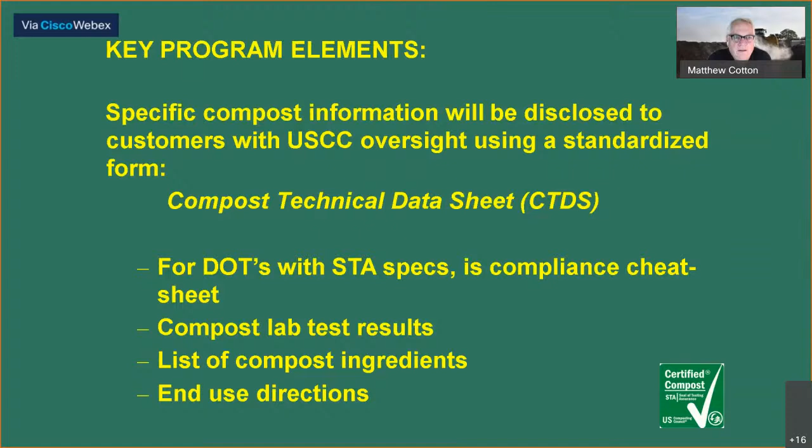The lab test results are there, the ingredients are there, the use instructions are there. And again, providing you a level of certainty that what you purchased and what you spec is actually what you're getting. I know that can be a multi-party affair here in California sometimes, but it's providing a certain level of certainty and hopefully an increased level of performance and success when you're buying compost from different folks. You can go to the next one, Jack.

Here is that technical data sheet. That's probably a little small to see. That is available on the USCC website. It's probably available if you look hard on the Caltrans website, but looking at different parameters, particle size, pH, passing the environmental health and safety standards we talked about. Again, it's sort of like that ingredient list on your cereal box telling you what's in it and what those numbers are. Not really telling you how to use it so much, but at least that it's a product, it's been tested, and here's, in fact, what those test results were.

And I apologize, that's a little small to look at. There's an awful lot of information packed into one sheet, which is exactly the way it was designed. So you can look at that pretty quickly and get some understanding of what you're getting, especially if you're getting multiple loads over a large amount of time, as some jobs do. So go ahead and move forward, Jack.

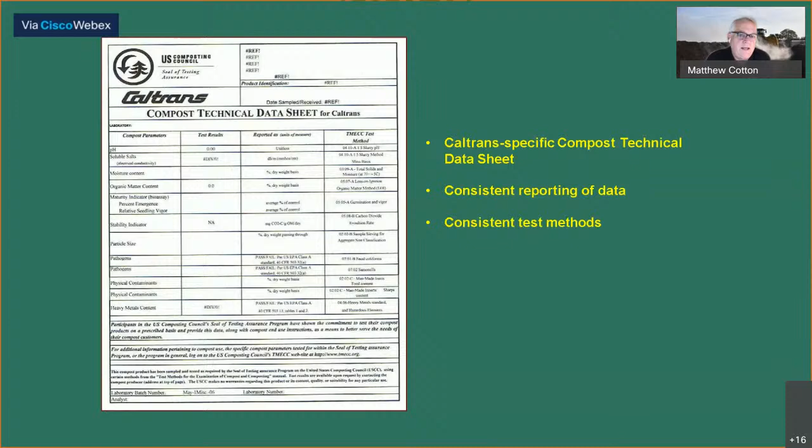And the numbers have been improving. The numbers maybe aren't as important as the total tons that are covered. I don't have that number, but it's clearly 75% of the tons manufactured in California are probably covered under the STA program. So way back in the day when I was working with guys like John Haynes at Caltrans and others, John would call me up and say, 'Hey, I'm up in Modoc, where can I find some compost?' And we'd spend some time trying to find the closest, most efficient composter for him to buy compost from. It was a pretty clunky process for him to have to call me to do that.

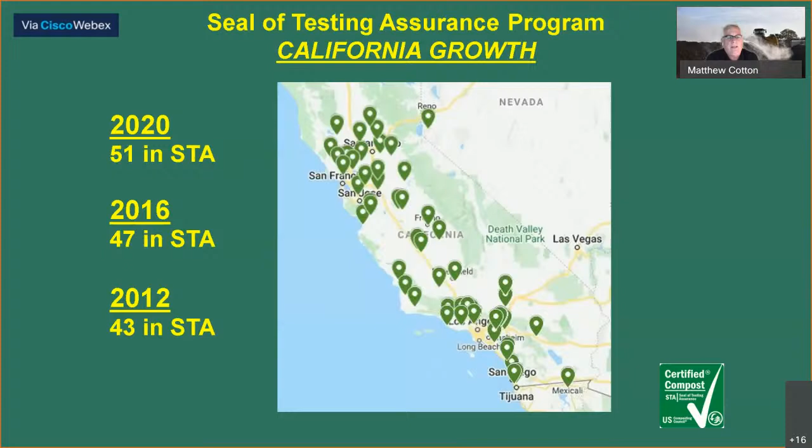And again, just trying to highlight the fact this is not new. Some of you participating have probably been following along for a long time. Others may be new to this, but this idea of compost use by departments of transportation in both landscaping and erosion control applications is really widespread. Folks in Maine, folks in New York, folks Ron has worked with for decades have really been doing this for a long time. And again, it's undergirded with research that Britt mentioned, and you can find with a quick Google search lots of stuff from Cal Poly, lots of stuff through UC Davis, other universities around the country. San Diego State was mentioned a few times. There's really a lot of support for the efficacy of this material in these applications.

And so the requirement of the STA is becoming more and more popular with specifying agencies, whether that's Caltrans or ODOT or WashDOT or whoever it might be. And also you're going to see a lot of cities and counties piggybacking on top of that as certain legislation like SB 1383, that Neil mentioned earlier, looks to find more jurisdictions speccing more compost to meet their obligations for procurement. So a lot of folks are going to be looking at Caltrans, seeing what your experience has been and trying these in spaces that they manage, whether they're steep slopes or roadways and parks, et cetera.

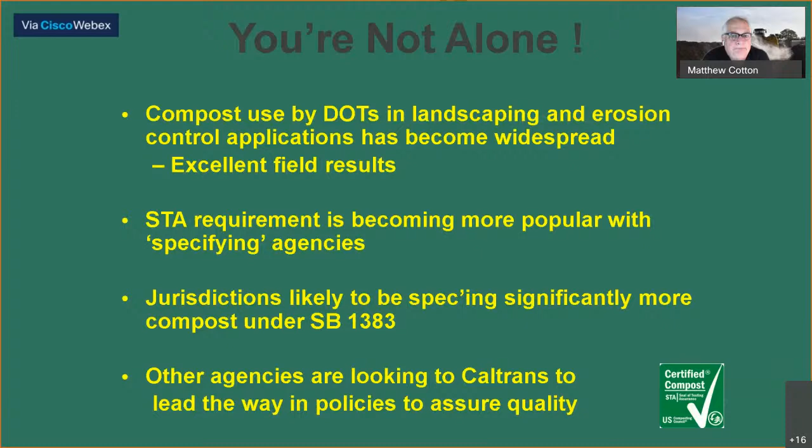So, what if there isn't an STA supplier or one with enough supply on hand for a bid? There are ways to get material vetted pretty quickly. There are other ways to tag team if you just have a small composter in your area. But you really do want to buy compost in this program.

There's a lot of support behind it, a lot of testing. When you're buying something that is not in this program, does not have the testing and the assurance, you're really opening yourself up to a lot of uncertainty, a lot of questions, a lot of performance issues. So you really want to be careful when you're doing that. And again, as you can see through the brochure, there's a lot of resources both within Caltrans and CalRecycle and the compost industry that can help you find that.

I'm sure if there isn't enough supply in a specific location, that person can probably network with their colleagues and find material for you. Again, lots of language. If you're looking for alternative spec language, tremendous amount of resources on the U.S. Composting Council website, on the CalRecycle website.

So again, lots of resources, and the folks who are presenting both today and tomorrow, as far as trying to get the right specification for your specific job, trying to support that with perhaps a case study or some underlying research to understand what kind of performance you might expect. There is a lot of data out there. I know websites don't always stay up to date, but there is a tremendous amount of information out there if you look even a little bit hard for it. What you're doing has probably been done somewhere before, and there's probably some good stuff you can find to help support what you're trying to do.

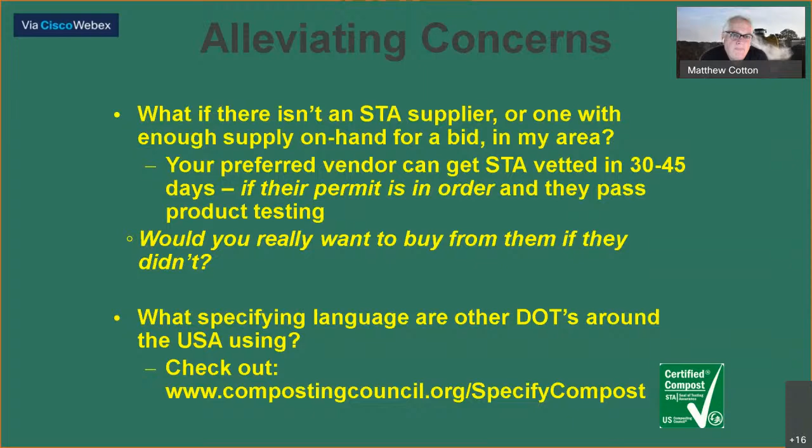So again, this is the STA lab sheets. Other states are using this, and the Caltrans example just as a way to meet the specs and really understand what you're getting, documenting what you've gotten, what you're purchasing, what the various parameters are for what you've purchased and how those might perform. Go ahead and go to the next one, Jack.

So I'm not going to go through these, but as Britt mentioned, and as Ron will mention, and speakers tomorrow will mention, there are lots of applications. I know Caltrans does a whole world's worth of work on this great state, this big state of ours, different soil types, different conditions, obviously different slope steepnesses, things, but lots of ways to use compost to get a good result, to stabilize those slopes, to minimize the impact on stormwater, get that water absorbed in place, and to beautify the landscape. So we have all sorts of case studies, again, on the Caltrans websites, on the CalRecycle websites, plenty on the U.S. Composting Council websites.

So again, if you've got a project in mind, you're thinking about, you want to use compost, probably somebody who's done something reasonably similar, probably in California, certainly around the country, whether it's wetland restoration or just slope stabilization, managing stormwater in all sorts of different situations. A lot of work has been done by a lot of folks over the years. So hopefully you can avail yourself of those resources and find some support for what you want to do, because the material's out there and it's of a quality that will really get you the performance you need.

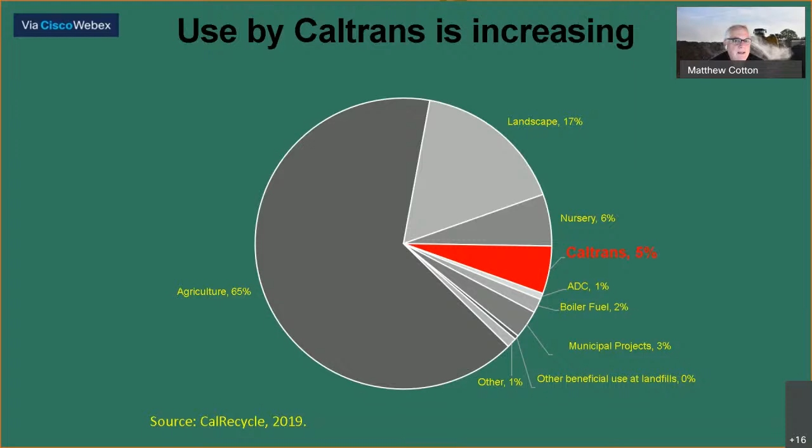So in the end, if it isn't certified STA compost, what is it? I'm doing this on behalf of Hillary Nichols, whose job it really is to administer the STA program at the USCC. With travel restrictions and everything, she's back in North Carolina, but you can get a hold of her if you have questions, want a list of composters, or want to dig into the spec sheets, or understand who's available in your neighborhood. That's a great resource.

Contact Hillary and she can help you out with all sorts of details with the program. If there are composters on the line and you want to be part of this program and you're not, that's definitely somebody you want to get to know to understand what it takes to submit your products to the STA program. So you can go ahead and move forward, Jack.